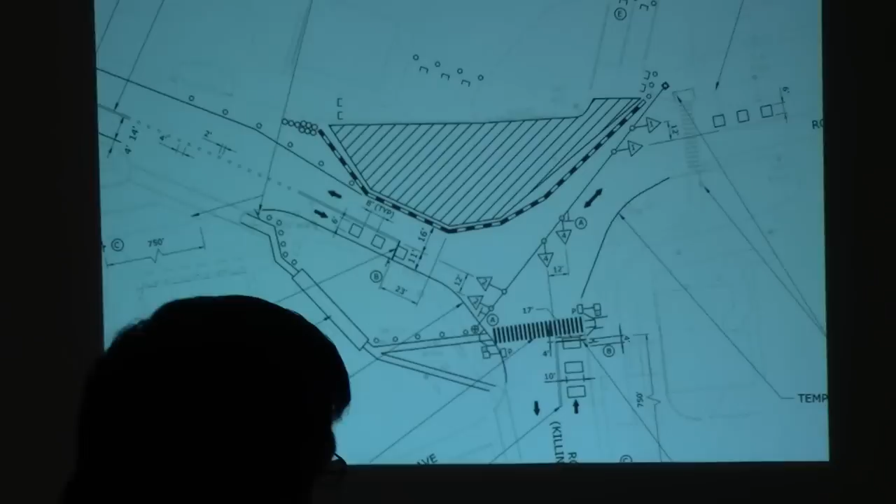So in order to do that, we need a lot of room. You need room to put a crane, room to get trucks in and out to haul the debris out. You need a lot of room. Thankfully, we have room, and we're still able to manage.

If you notice, in this stage, we still have traffic in each direction. Let's just talk about that. So we have some shared traffic, right? Let's see if I got my traffic plan that shows my sequencing right here.

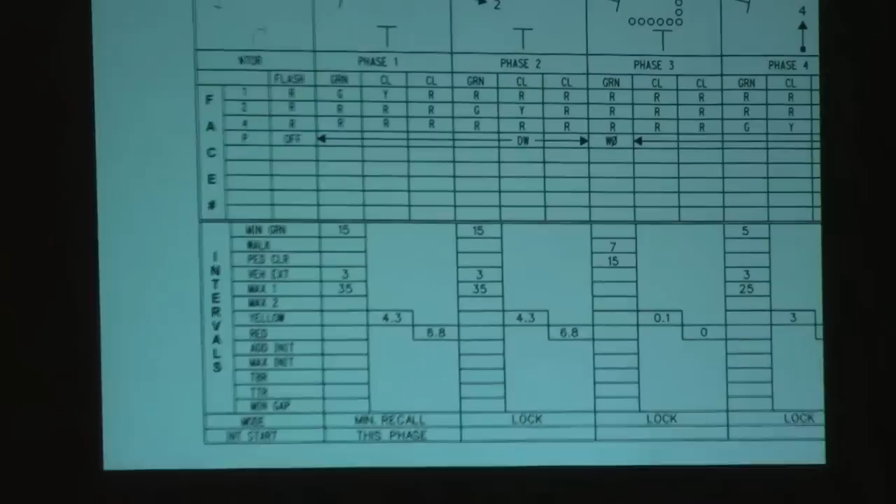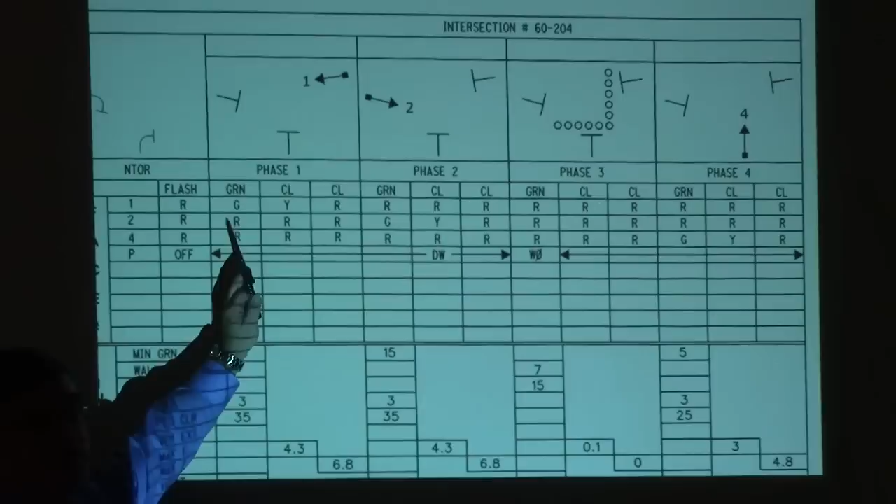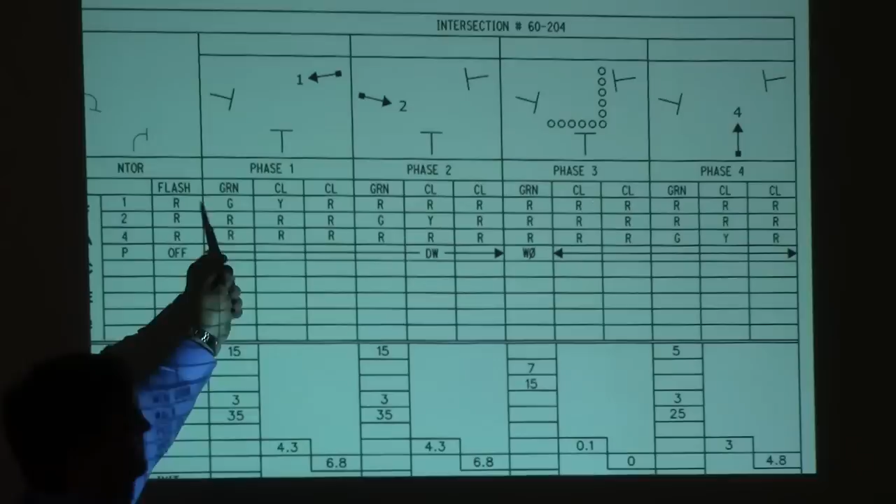I'm not trying to be overly technical, but what this is trying to show everybody is that the lights are going to go green and red. We're still going to maintain a traffic signal. So people going west on 154 are going to get a green, and nobody else is going to move. Then people going east are going to get a green, and nobody's moving.

The road—before you confuse everybody—what everybody considers 154 is north and south, not east and west. Thank you. By the compass it's east and west, but the road is north and south. Connecticut is a funny state. I'm used to working on the Gold Star, where northbound is actually the southern bridge and runs west, or east—incredibly confusing in this state, so thank you for correcting me. No, because as an engineer, I look at true north on the plan sheet, so when I talk to the contractor and say the north abutment, he knows exactly where I'm talking about. None of us will, though. So, thank you for that correction.

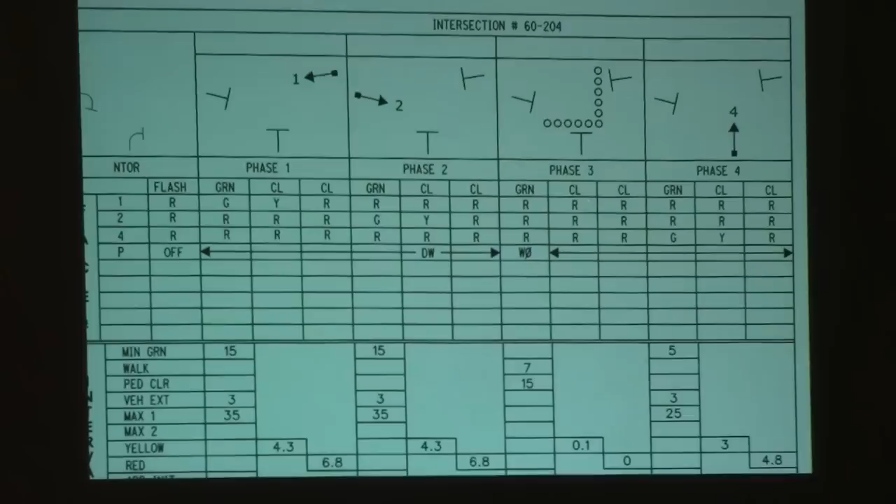This is a pedestrian phase. We're still maintaining the ped buttons so people can get across, in which case everybody stops. Then we have this phase, which is 154—sorry, 81, 154 is the other one. Those people can go either left or right. If you go back to the plan sheet, that's what we're maintaining.

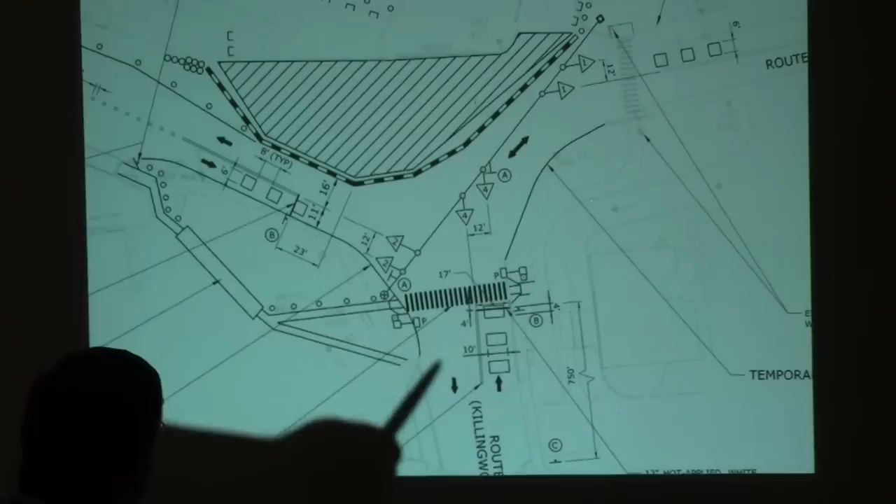These little square boxes that you see—I don't have a laser pointer, but those are sensors we put in the pavement. So this is not just a dumb traffic signal that cycles and cycles. This is an intelligent traffic signal. It thinks, it knows when cars are there, so it's going to adapt to peak flows when traffic is high, and at 2 o'clock in the morning when there's no cars, it's going to say, hey, there's no cars. This isn't a simple traffic signal—we have the room to put it in, we have the traffic volume that requires it, so it's going to get put in.

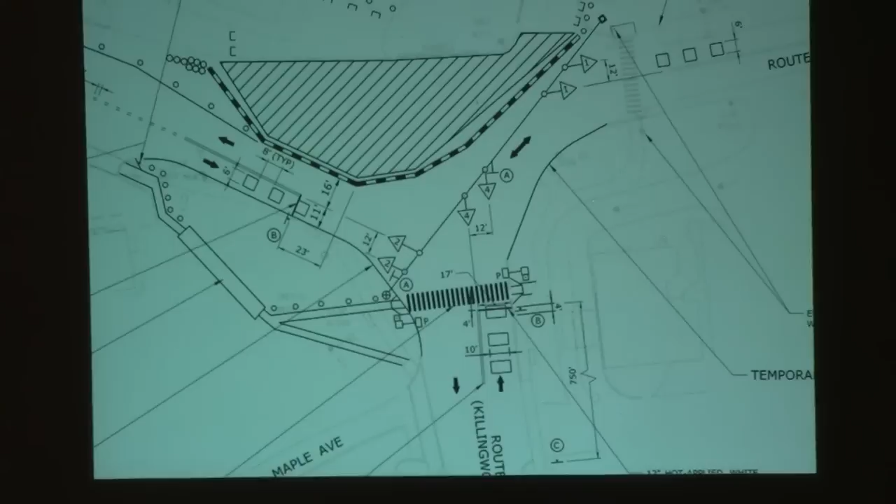We don't always get that everywhere we go. Sometimes it's just back and forth, with no logic to why it's doing that. Here, we're not giving that up.

So, for traffic purposes—you started to say about 154 south, is that an arrow going north and south there? So it's only one lane of traffic there? Yes, basically it's a cattle chute. It's a very challenging turn to navigate, so it's really one direction at a time navigating through there so we don't have an accident. That's going to be a different look than everybody's used to.

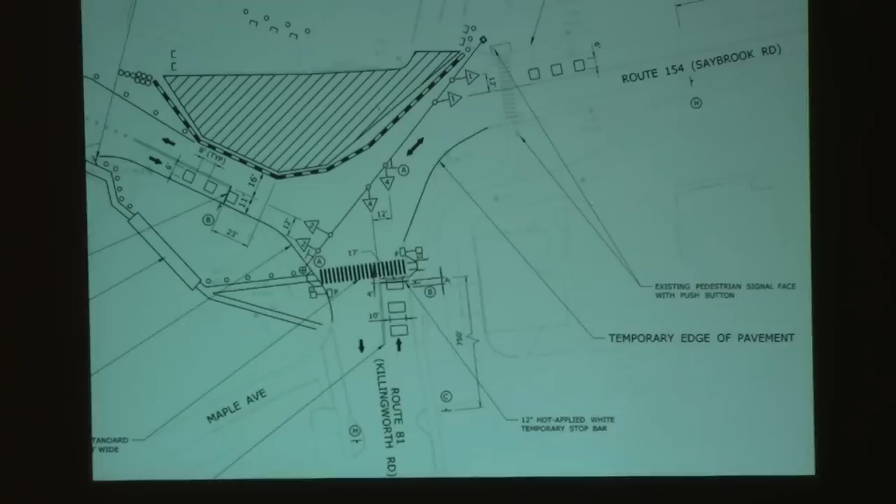It's necessary because that's where the bridge currently is, and that's where we need to put it. We were just out there earlier talking about it—we're going to do everything we can to delineate those barriers. Those are going to be concrete jersey barriers. The black and white checkered things you see are immovable objects for obvious safety reasons. We'll make sure they're well delineated. We were looking at the illumination—we'll make sure we have good illumination out there so we don't have people driving into these things and getting hurt. But that's going to be a big change when we do that.

For discussion purposes, you should expect to see that configuration after the 4th of July. We can thank Peter Borio for that—because contractually he could get out there earlier, but I think he recognizes it's better off to wait till the holidays are over.

So that barrier and that stage of construction is scheduled for after the 4th of July, okay? Now let's just be honest about how we get there. The barrier goes in on the 4th of July, but we've got a whole road to build, where the grass and the trees are today.

So what that means is you can expect to see traffic being interfered with, although it's never closed. We do have to be able to get material out, asphalt back, machinery in and out, and we've got to construct that thing. Ideally it's being constructed when the bridge is open, so we're not interfering with you, other than the trucks coming in and out.

Does that make sense? If you're going to get in and out of that dirt area, how do you get in and out of it? Well, you use the roads, so you're going to see some interference to traffic. We're going to do it the best we can during off-peak hours, but that's what's going to happen. We basically have to get that grass area prepared for a road to put cars on it for July 4th, or after July 4th.

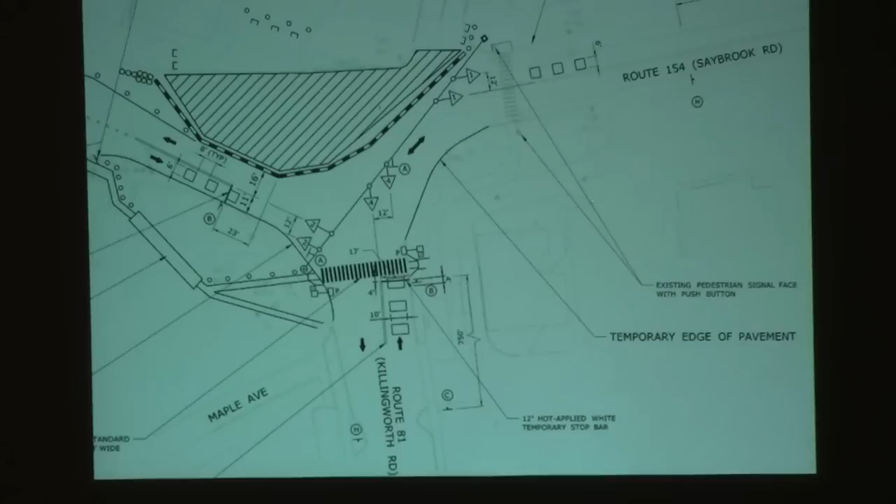Bob, I have a quick question. Will Candlewood and Depot be closed, or will you get to that? Let's get to that. I'm going to switch the map, okay Andrew? Andrew, you want to talk people through the detour for me?

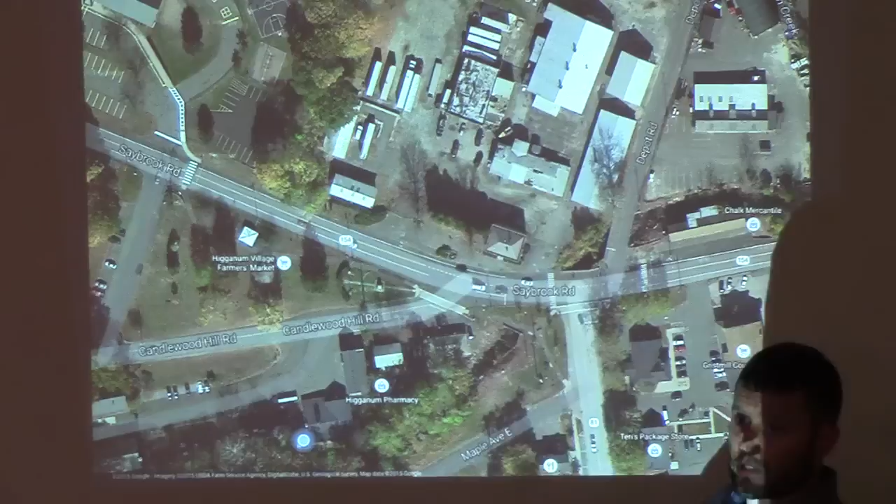So in stage one, that Bob was just talking about, our work zone is set up basically right here, but it will encompass the outlet to Depot Road. So we are closing access to Depot Road during stage one. That's the only road closure that we have. Candlewood Hill won't be affected, it's basically going to come into the intersection the same way it does right now. So we're only closing Depot Road, hence the detour signs that we were talking about earlier.

So anybody who needs to access the town garage, we have the detour sign set up where Depot Road comes back out, a little farther, right there. So we will detour cars down Depot Hill Road or Cagliari, which is a lot closer. Smaller vehicles can navigate down Cagliari, it's a pretty narrow road. So any deliveries anticipated for Depot Road, I'll talk to Phil and let him know they should come in via Depot Hill Road.

All right, so basically that's the only road closure. Then in stage two, when we set up our work zone on the south side of the bridge, Depot Road will be opened back up, and the phasing plan with the signals will be changed. I'll show you that on the slide.

So let's just make sure we have a good understanding of the first stage. Basically, this bridge is built half at a time in two stages. Okay, a couple questions. How long is stage one going to last that Depot Road will be closed? Number two, you haven't mentioned, and I haven't seen anything on, how is this bridge being built? Is it box culverts? Is it box beams? What is the quickest way that this thing is going to be done?

Well, I love that question, because I'm a bridge builder, so it's always nice when somebody asks that. This one doesn't move though, Bob. This one does not move, that's okay. Rick and I go back to the East Haddam Swing Bridge, which is one of my favorite places to work, which has its own unique set of challenges. So let's just talk about your first question.

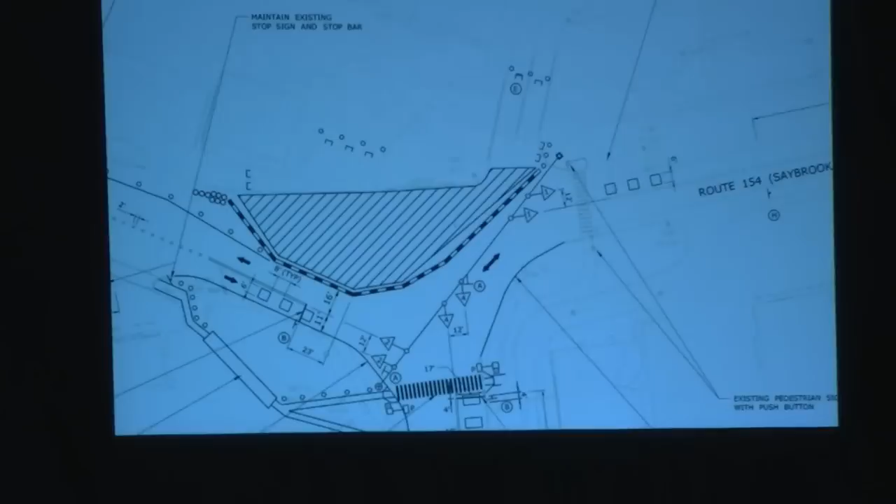Depot Road can't reopen until that bridge is complete - that's on that side. So it doesn't matter if you're working or not, that road's gonna be closed until the bridge is done. Regrettably, that stage we just talked about - stage one - that stage is going to be there for quite some time. Doesn't matter if it's summer or winter, the road's not going to reopen until that stage is complete.

And here's the other thing about this bridge - this is a very unusual bridge. 110 feet is probably on the big side for bridges in Connecticut, our average bridge is probably 60 feet. At 110 feet, it's not very long, but we make up for that in width. So you're basically building, my point is, you're basically building two bridges. Anywhere else, this is two bridges. You're really asking us to build two bridges, one each year, which is what we're going to do because of the width of this bridge.

If this bridge were like most places we go, it wouldn't be as wide as stage 1, and we'd be in and out in one season. Unfortunately, that's not what we're given to work with. It's got a lot of bridge deck here, a lot of structure to build - it's like trying to build two bridges. What is the length?

One of the reasons this bridge is being replaced is that it's hydraulically inadequate, meaning it doesn't like the water. So we're pushing the abutments back, giving more volume and area for the water to go through, and we're founding our bridge on piles, like the gentleman mentioned earlier. So no matter what Mother Nature throws down there, that bridge is going nowhere.

What is the shape of what's there? I'm asking. If you'll pardon me, what you have out there now, I'll show you some pictures that I have.

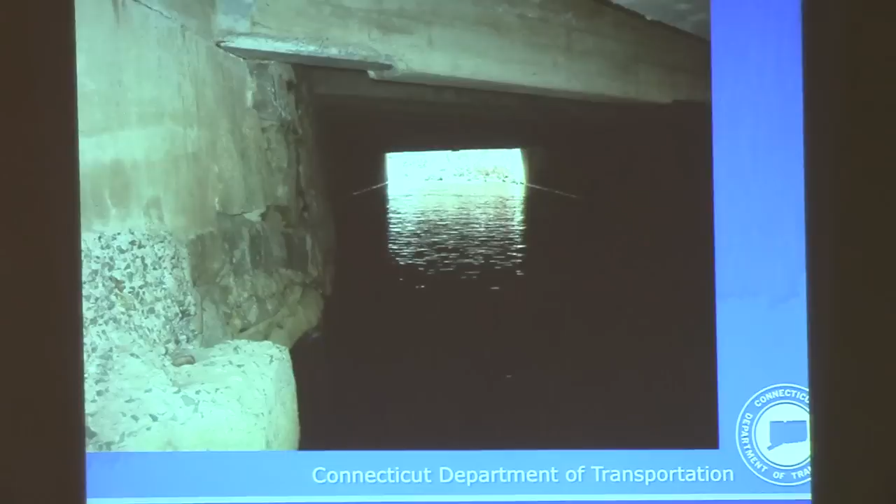You really have a mishmash of structures. It looks like this bridge was widened over the century from 1928, because when I look at the photos, I see field stone abutments, and then I see reinforced concrete abutments. So it looks like this bridge has been put together and added onto and cobbled on over the years. And that's good and bad, because the oldest stuff is the fieldstone stuff, and that's in the middle of the road, and that needs to be replaced.

It's not pile supported, so it's very susceptible to scour, or being washed underneath. It's technology of 1928. They built them good back then. I mean, it's still here. Yes, sir, it's still here.

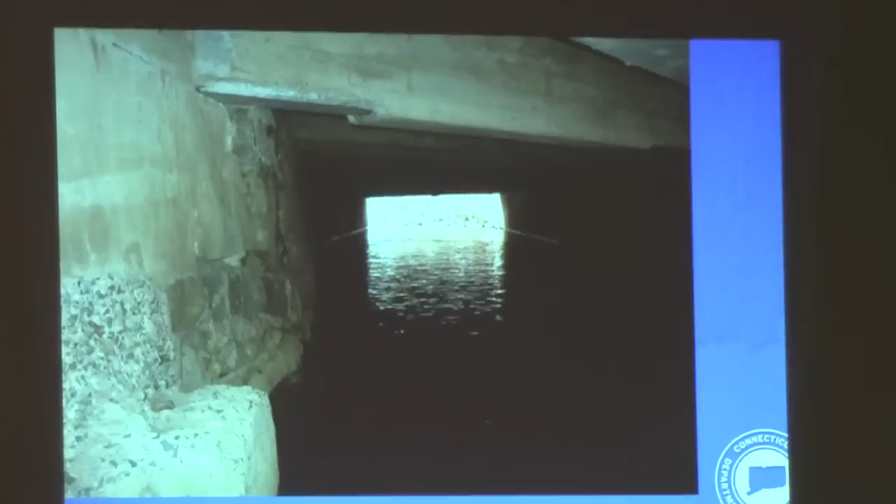Who's responsible for the inspection of the E&S controls? We are responsible, the Department of Transportation. So on this job, we have a DEEP permit, which is part of the contract. The contractor is responsible to adhere to all of those environmental controls.

This job is inspected by the state of Connecticut. Andrew is the resident engineer, he's the guy who's going to be here every single day, not just him, but he's the lead person. He's going to be working with Pete's crew to make sure that we all do the right thing every day.

So if the town has an environmental planner or coordinator and has concerns or wants to talk to us, you should talk to Andrew. A lot of towns do, and the more people helping us with that, the better.

Yes sir, is there any thought to making Cagliari Place one way? I drive it a lot, and if somebody turns in when I'm trying to come out, it's very dangerous.

All I would say is, as a state of Connecticut employee, we only deal with state roads. So if it's not a state road, the Department of Transportation doesn't get too involved. In working with the towns, if they wanted to do something like that, they would go through our state traffic commission to coordinate that. At this point in time, nobody that I'm aware of has had any discussion with the department.

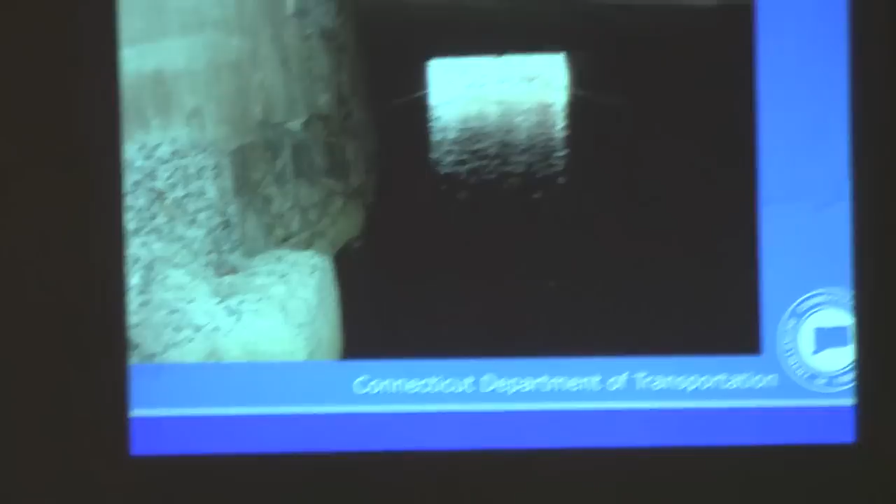Any other questions before I go to stage 2? Just on stage 1? Yes sir. Having a business in the center of town, I'm a little concerned about how traffic is going to work.

Sure, coming north on 154 into that section, into the intersection, that's going to be alternating traffic through all of phase 1? Andrew, it's just going to be alternating traffic right through here with the cycle that he explained earlier, but only in that one spot, basically through the gorge there that's coming down. Yes, exactly, think of it as one big intersection.

Yep, the intersection's kind of grown out to accommodate the traffic flow. So you'll still stop at the same point you were stopping? Yes sir, basically the same. Andrew, show them the signal heads, the 4s, the 1s. So those are the signal heads - this span wire going right through here is up above, and all these signal heads, you see the little triangles, the 2s, the 4s and the 1s.

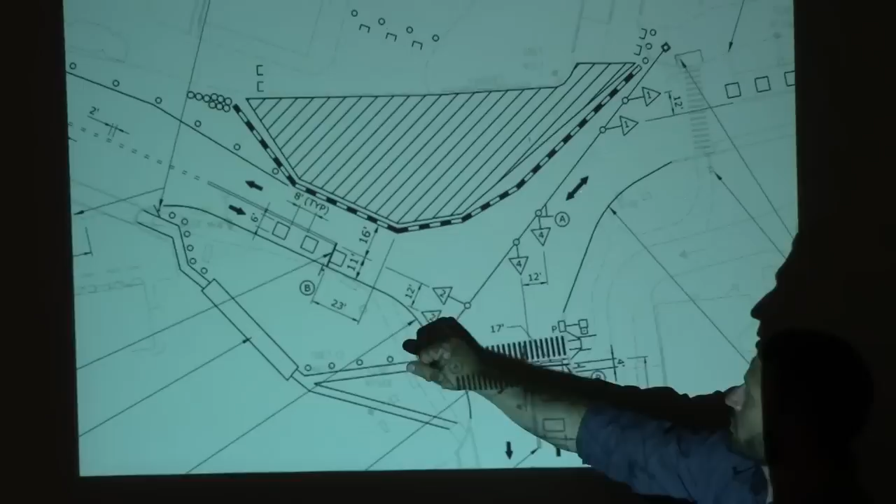Those are going to be the new signals that everyone's looking at when they're coming to the temporary intersection, the signal for that stage. So 154 northbound, you're going to be seeing the 1s as you're coming down the hill. Obviously 81, you're going to see the 4s. 154 south, you're going to see the 2s.

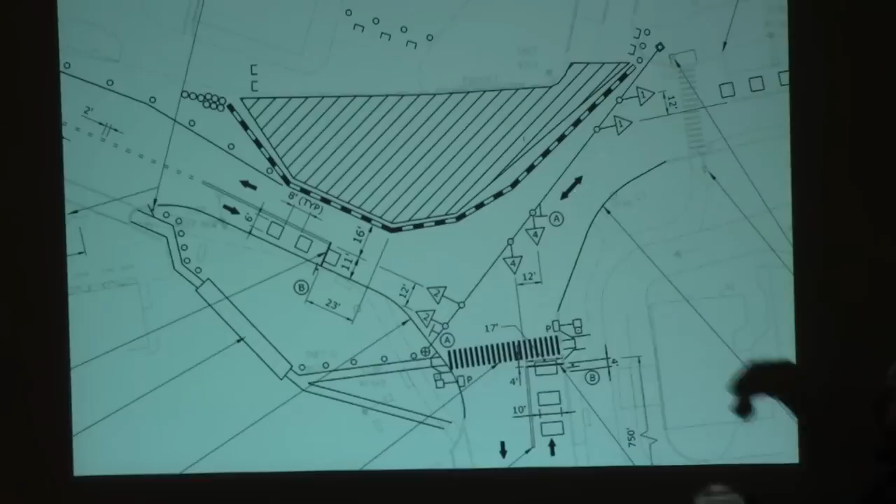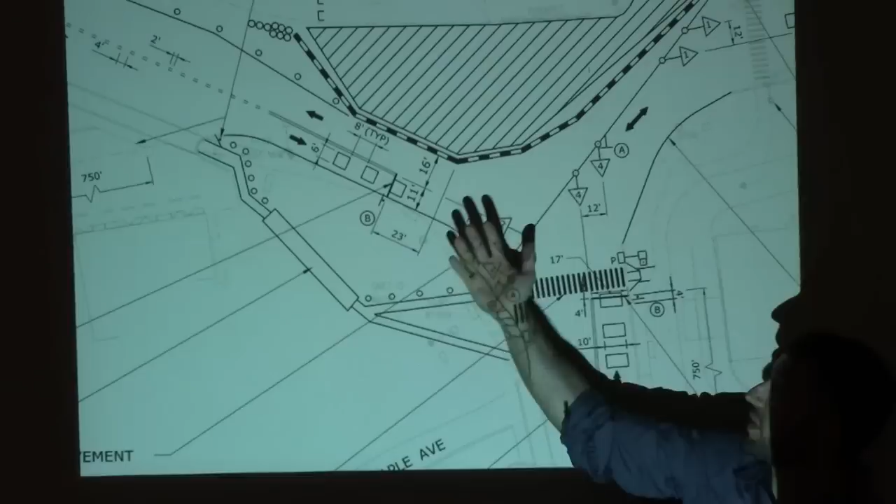Can you go over the pedestrian crossing too, the pedestrian bridge, Andrew? So in stage one, basically we're moving the curb line, which right now is out here more. We are relocating that curb line into the park, basically right against the existing south parapet of the bridge. So where you've seen some of the excavation going on today, we're stripping the topsoil off of that area.

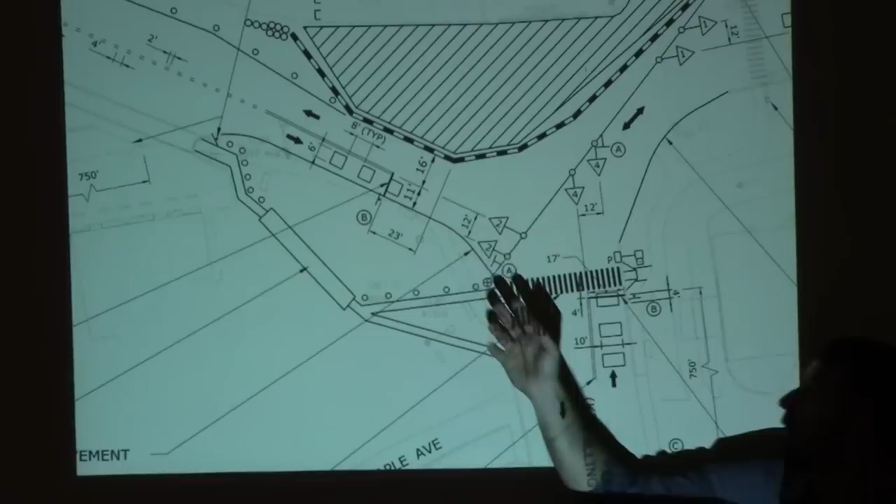We're going to remove that park for now and reestablish it at the end, but we're installing a temporary pedestrian bridge. Let's just show them. I'm going to move this over here. So there's temporary pedestrian access, go ahead, Andrew.

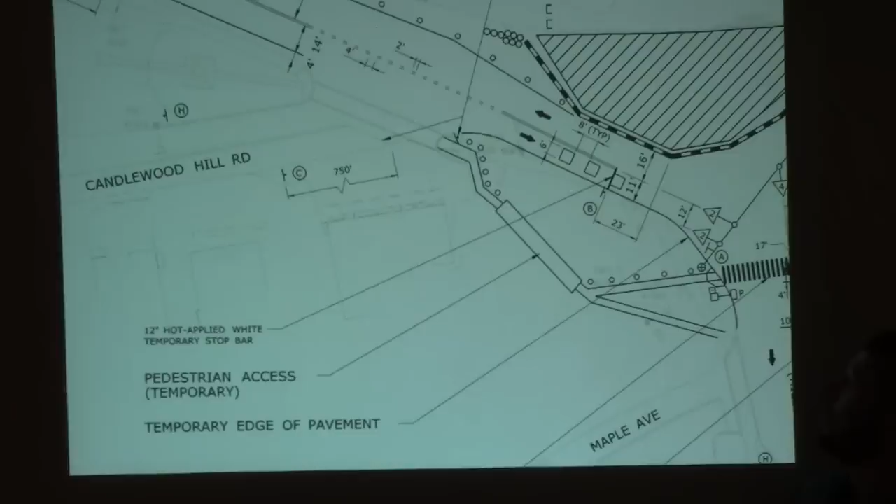Yep, and we're going to relocate the sidewalk that goes through here now. We're going to access the pedestrian bridge so people can safely go around the work zone and still get across the intersection safely. We're going to put a temporary pedestrian crossing in, we're gonna have a little pedestrian button.

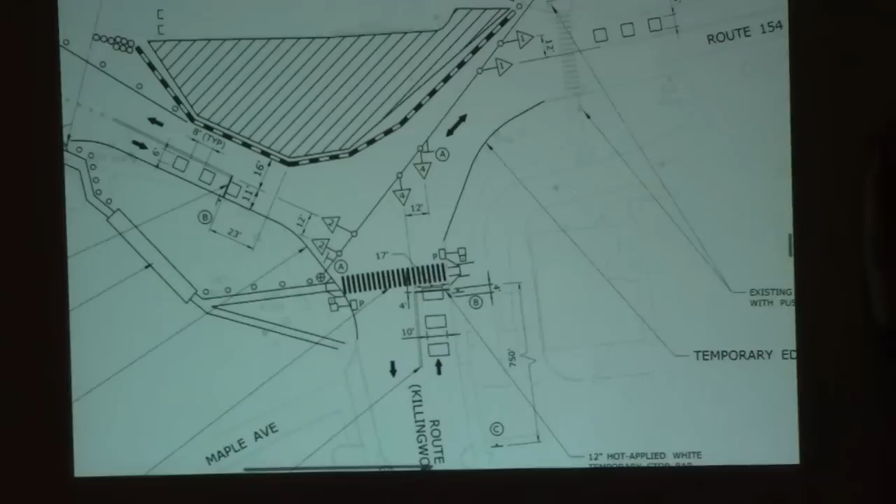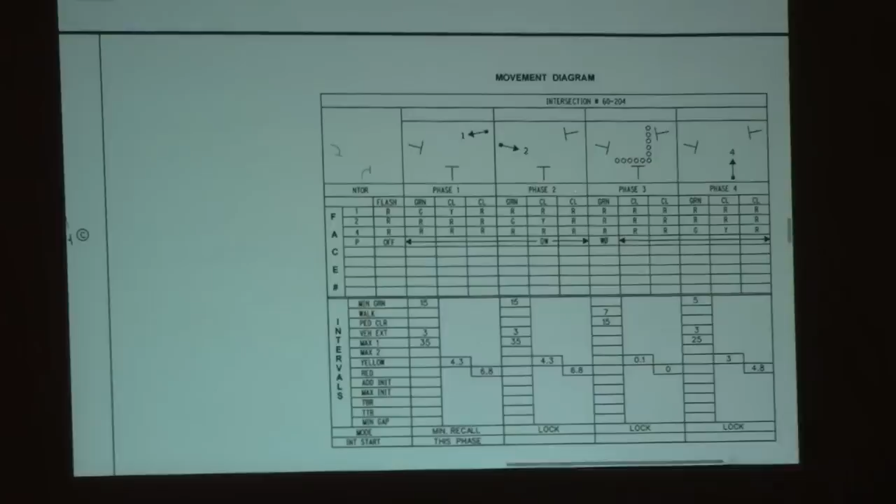That was the second cycle, I believe - or second or third, third, whichever one it was. Third cycle, right here, so phase 3, which if nobody pushes the button, then it won't go. We'll skip right from 2 to 4, that way traffic keeps going.

About construction hours - great question. Well, that's mine. You're on, Pete. 7 a.m. to 3:30 p.m.

And school buses? Will it be accommodated just like ordinary traffic? Right, no special accommodations for a school bus, other than they can get through like everybody else. 7 a.m. to 3:30, that's our regular hours.

That said, if we have an operation running where it's advantageous from a point of quality or continuous operation, we may run an hour over, something like a concrete pour or something like that.

So the state of Connecticut charges a day. A day is a day, and there's 24 hours in a day. So we don't traditionally tell somebody they can't work beyond 7 to 3:30. We give Pete 400 days to finish this job, and if he doesn't finish this job, it's $2,600 a day in fines that he pays. So I like Pete and I don't want to charge him, but at the end of the day, business is business. He's got 400 days to finish this job, okay?

And so to be honest with you, no contractor wants to go in and start working overtime and spending money unnecessarily. However, if Mother Nature throws a ton of rain or a ton of snow and he falls behind, then all bets are off because I'm not giving him any relief from it.

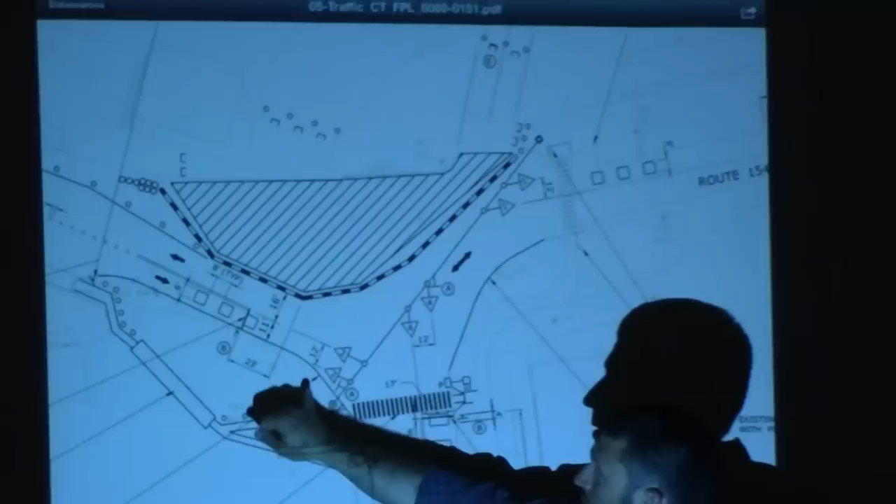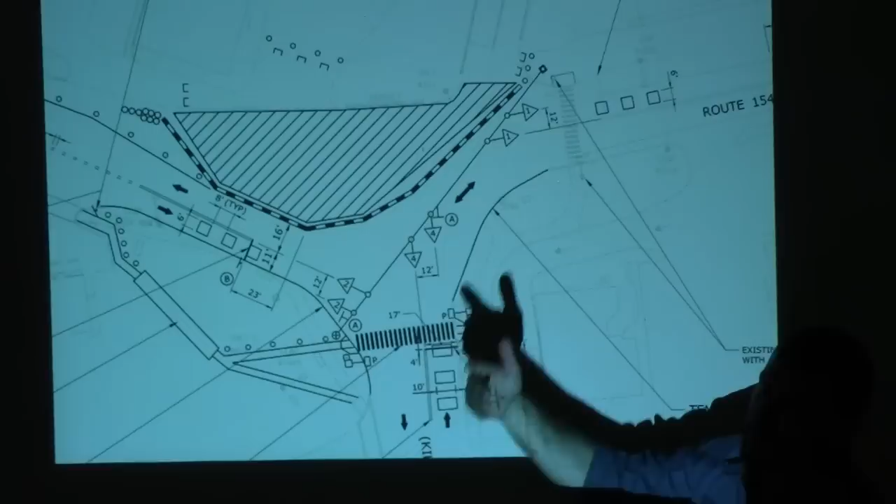So the temporary curb line that you see right here, and right here, to the face of barrier, is 27 feet. We've got an 11-foot lane and a 16-foot lane. In essence, we have 27 feet over here as well. No cars should be parked in here. If there's an emergency vehicle coming, they're going to be stopped at these stop bars.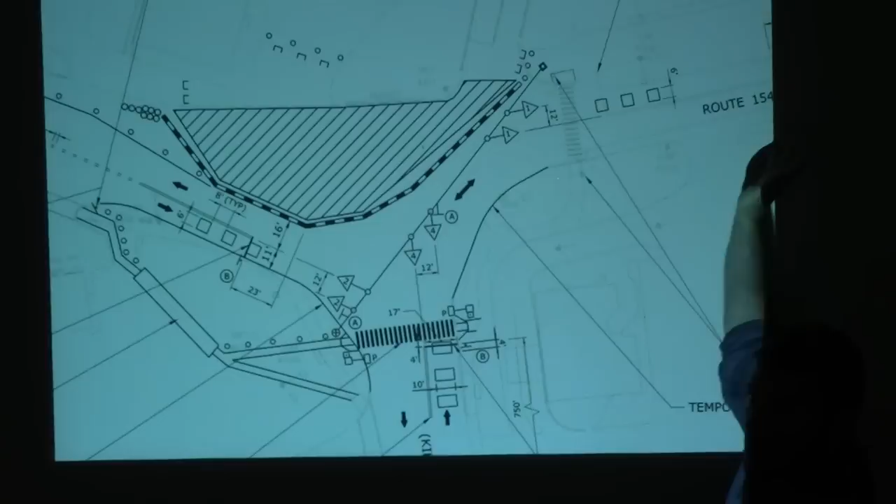If they're going through the intersection and they clear, great. I would hope someone's smart enough to get out of the way and not just park in the middle. So you have the bridge, an access of 17 feet? Yes, sir, which we think is adequate. It's the common sense of the people though, which I can't engineer a solution for.

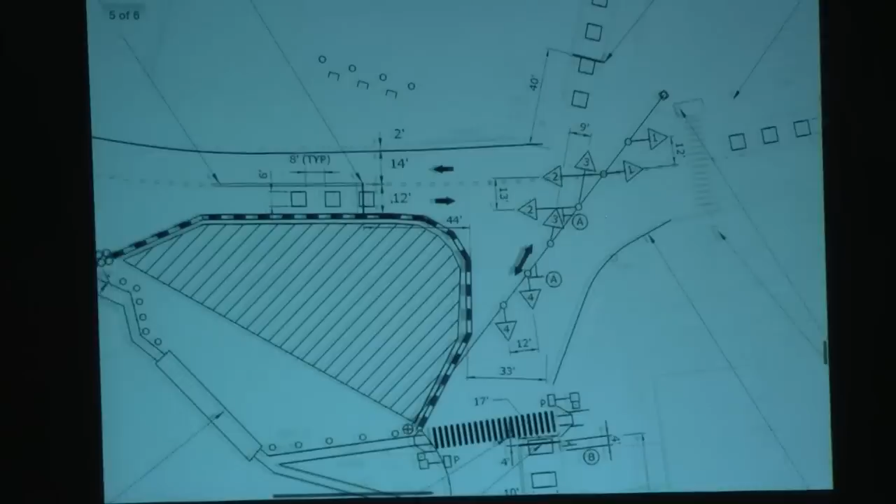Okay, so I'm ready to go to stage 2, which shows the northern half of the bridge completed, with traffic pushed to the northern half. Then we'll take up the roadway everyone's been using in stage 1 and build the second half of the bridge. The alignment and line of sight issues are all but gone, pretty much a straight shot on 154, and even Depot Road is opened up. So we're all anxious to get to stage 2.

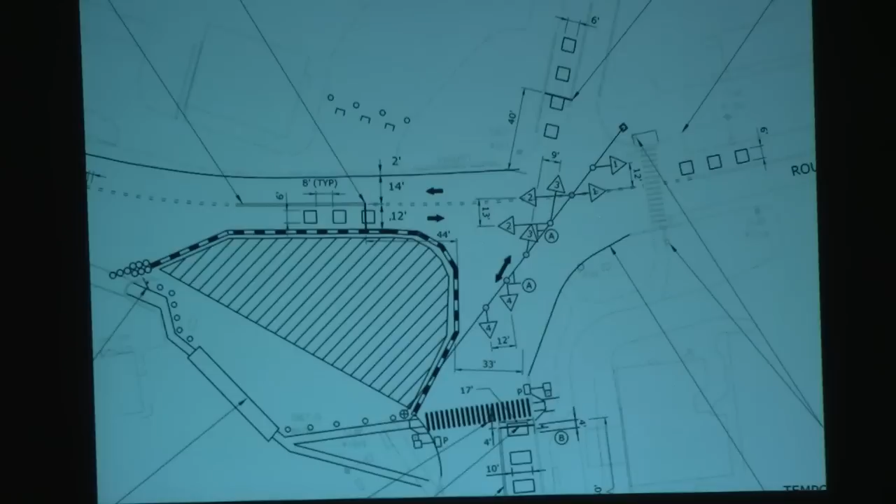Looks like the temporary bridge is still in place. Andrew, we're reconfiguring the signal heads, just need to get them lined up. That doesn't happen in a day. You guys need to understand, to go out and reconfigure those things, we'll be out there and you'll have to weave in around us. We'll do it during the daytime, and there will be those kinds of interruptions. I'm going to ask you to be patient. Let us get in, let us get out, and let us give you your road back so you guys can use it, okay?

It's just not an easy thing to do a $3.5 million job and have nobody notice. We're going to try. We have a pretty good stage plan, and we isolate the work areas from the traffic pretty well here. It's one of the better jobs I'm actually asked to build this year.

Pretty straightforward, right? Will the town be notified on days when you're redoing the signal lights and the intersection's going to be closed, so they can update the website and put an announcement on to let people know that's happening? Absolutely, we're up to doing all of those things.

When we get into the heat of things, we're going to have monthly and bi-weekly progress meetings. So I'm here to tell you the town will never be surprised about what we're doing or when we're doing it, because Andrew is going to be charged with making sure the town, and they can let us know who those people are, and we're going to give you our schedule. But if it rains for 4 days and we have to change, you're going to know as much as we know, and we're going to pass that on to the town.

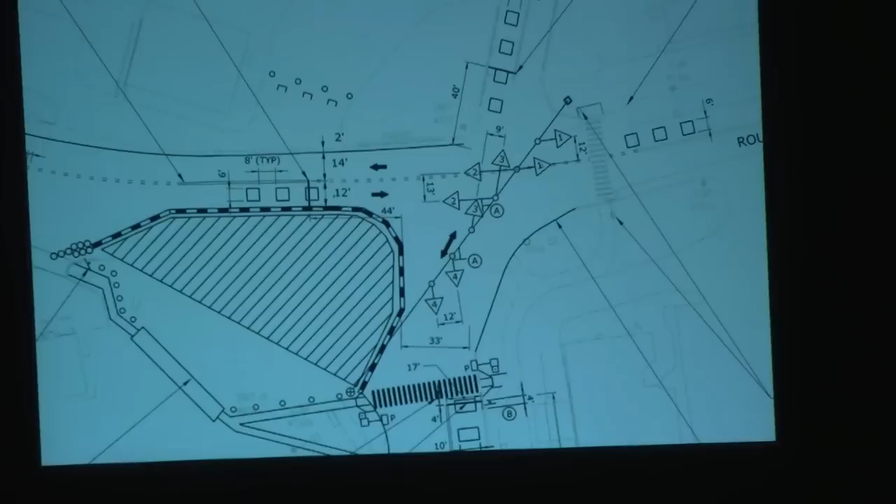I think once we get these wall barriers up, it's going to freak people out a little bit, and they're going to have to slow down. They're already slowing down looking at everybody walking around. Well, you know, to some degree that's a good thing. To some degree that's a good thing. Traffic calming.

Weekends, you're gonna have people, and even though the workers aren't working there, you're gonna have all this coming in.

So to your point, the Route 9 job we just did was fairly extensive, and we were encouraging people to use these roads. We tried to time the job so we weren't encouraging people off Route 9 and then squeezing them through a tight area. We're trying to coordinate those activities as best we can. At the end of the day, people are going to take alternate routes. The state of Connecticut isn't directing anybody where to go. The roads are open, so local traffic does what local traffic does.

To some degree, Pete, Andrew, and I can't control what local traffic does. I can tell you we're not directing it. Local traffic is going to do whatever it's going to do, and that's a common problem everywhere we go. All we can try to do is work with the town and come up with a solution that satisfies everybody.

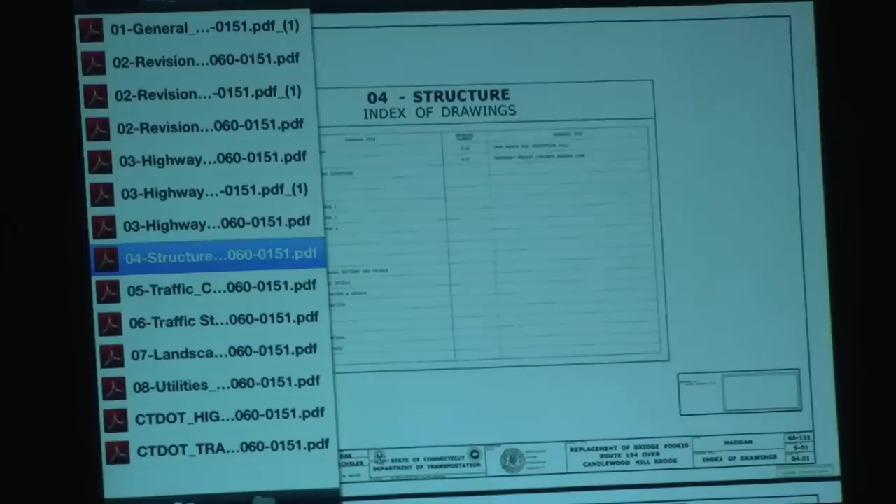Let me just go through what I have, and I apologize. These are the kinds of conditions that we're up against. Let me just see, do you have all of them? Do you have S02, we have drawing number S02? I do, I just have to pull it up. So if I go into ProjectWise... is that a bridge, no, structure sheet? Yep. There you go, right there. This right here. The bottom. Sorry, go up, go up. There you go. So it's a cross-section, right? Of the bridge when we're done. And you can see just massive structures, footings, 2 rows of piles, battered piles on the front, plumb piles on the back, doubly thick abutments. This bridge is going nowhere when we're done.

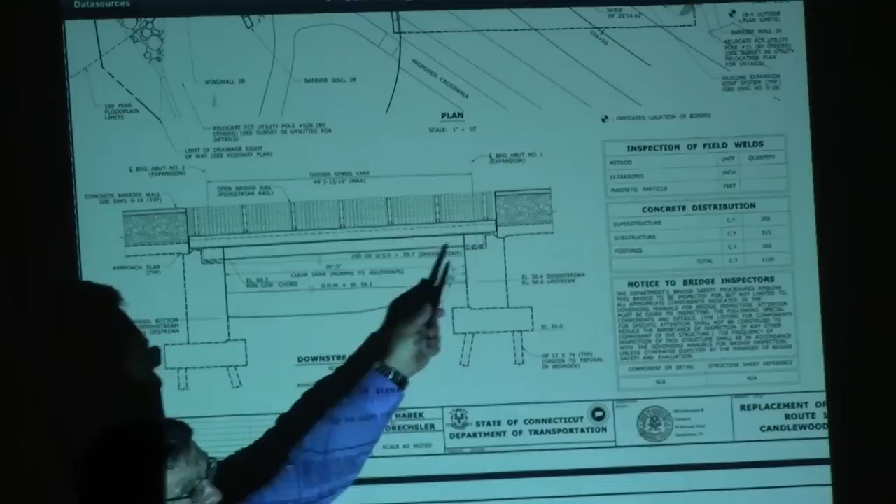Architectural treatment on the outside, so it's going to have some character. One of the things that's unique, we have what I call a see-through parapet. Most of the bridges we have a solid concrete block wall. This has got some see-through parapets, which gives a nice view, you get to see the stream upstream and downstream. It's very, very nice. It's not your standard cookie cutter type of bridge that you used to see on the Route 9s, right? So it's got some extras, some flair to it.

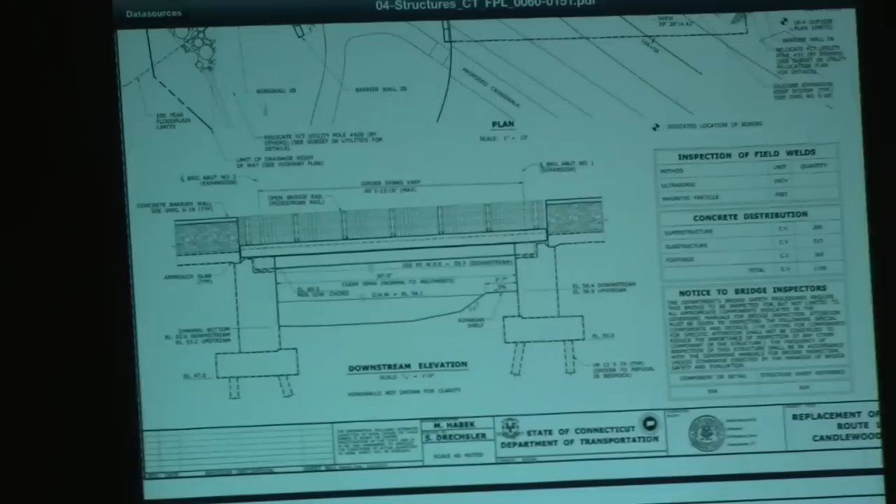Aluminum rails? Yeah, aluminum bridge rail. No maintenance? Yep. Expensive, yes, but nice. Is it wider than the current bridge or the same? So basically the footprint of the old bridge and the new bridge, it's basically the same.